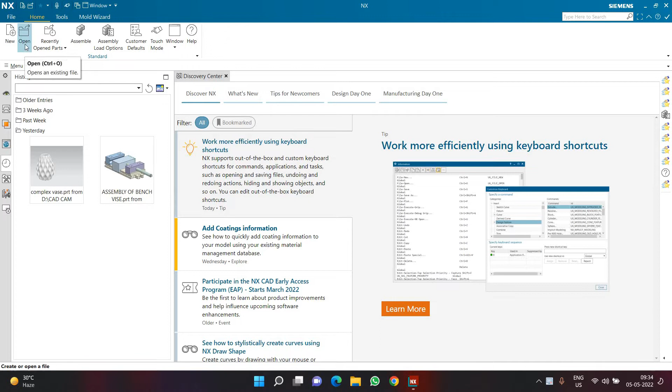In today's video, we are going to understand again about the same thing, that is the assembly. Now in the previous session, we have already completed the assembly, that is we have already placed all the components where it's supposed to be. Now again I'll repeat, if you want to open an assembly, you have to click on open. You have to browse for the respective folder wherever the assembly is placed.

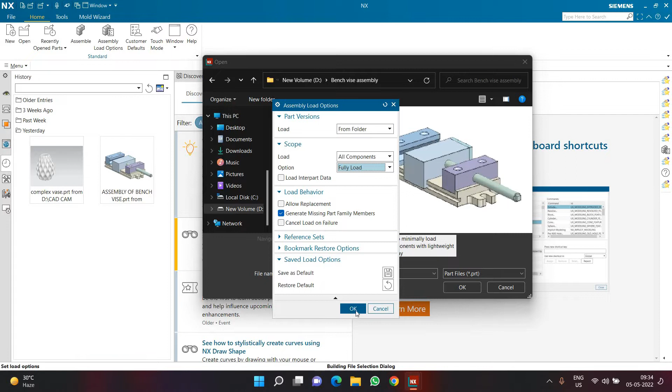So in this case, the assembly is being placed inside the D drive, inside the Bench vise assembly folder, and you can see over here there is a name called assembly of bench vise. We have to click on options. We have to activate this option called all components from folder, and we have to choose fully load. If you need to allow replacement, you can always check this particular box. Once this particular part is ready, then you have to click OK and then select the assembly of bench vise and click OK. Now this is how you are going to open the assembly.

In today's session, we are going to learn about how to create an exploded view of this same assembly. So what is an exploded view? That is how exactly the things are going to get assembled, or how exactly the things are going to move in order to get the assembly done. Okay, so let's get started.

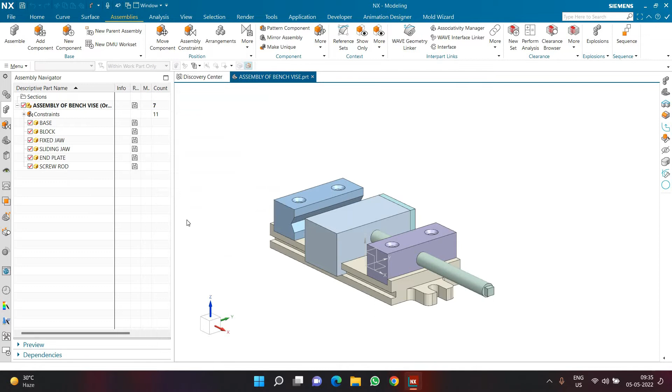Now here, in order to create an exploded view, I have to go to the assemblies tab, and here we have an option related to explosion. Now once you manage to find this particular option that is related to explosion, you have to click on the explosion option. Then you have to create a new explosion. So here I'm clicking on creating a new explosion, and now the process is fairly simple. You just need to select the geometry.

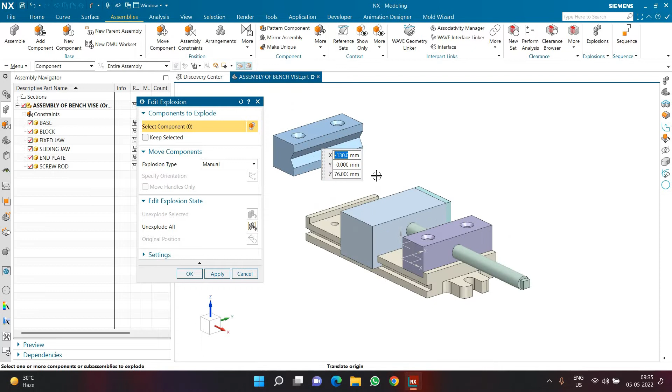Then here in explosion type, you can either select manual or automatic. I'll choose manual. And here in specify orientation, you just need to move the geometry. For example, here I'm moving it up. Again, I'm selecting the geometry, specify orientation, moving it here. Okay, so this is how the part is going to look when it is exploded, or where it is not in place. So this way a person can easily understand how the parts and where the parts are placed together in order to complete the assembly.

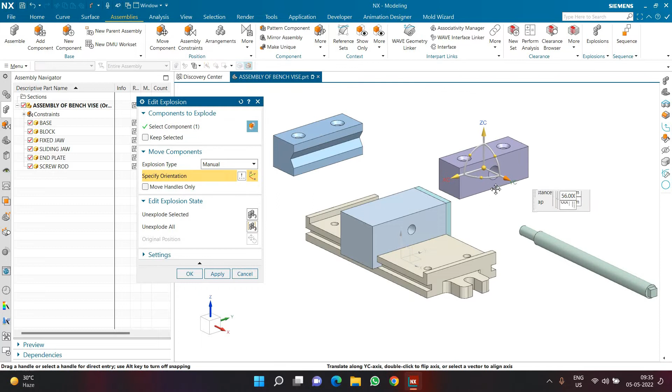So here, for example, right now I'm moving the screw rod a little above. Then similarly, I'm selecting this and moving it up. Okay, you can either move it slightly up or more up depending upon your preference. Then again, selecting this and moving it here. Okay, I would prefer to move it in a particular way where how the assembly is going to be done. So let's say, for example, I'm moving the end plate over here, and then I'm moving it up. So this is how I can define where the location of the end plate is going to be.

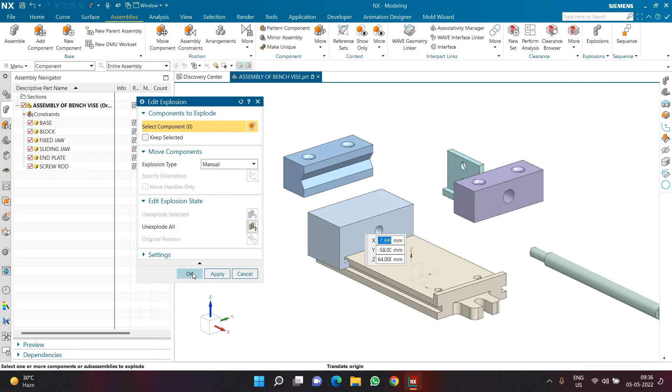Finally, I'm selecting this, moving it in this direction, then again selecting this and moving it upward. So once the assembly exploded view is completed, I can just simply click OK, and this is how the exploded view is going to look like. Now the best part is, anytime I want to see the explosion, I can hide, or I can see the explosion anytime I want to.

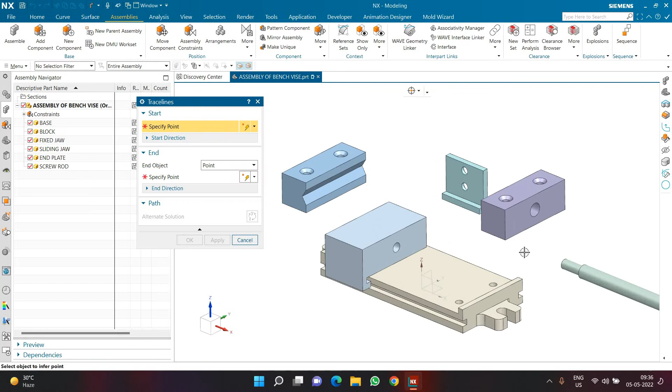Now the best part about this is, whenever I am in the explosion view, I can also click on this option called create trace line. Now once I click on this option called create trace line, I have to specify the start point and the end point. So here in this case, for example, this particular object is going to fit here, so I can create a trace line like this.

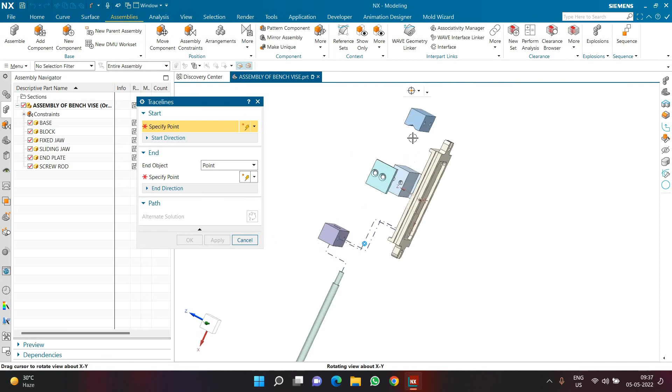So this way a person looking at the diagram can easily understand where and in which location the parts are going to go. For example, this particular hole is going to match over here, so I'm creating a trace line here. Similarly, this particular hole is going to match over here, so I'm creating a trace line here. So once the trace lines are completed, so for example here, this particular part is going to go over here, so there is a trace line here, and again there is a trace line here. Okay, so we can define this trace line. This will allow the software to understand how the parts are going to place together.

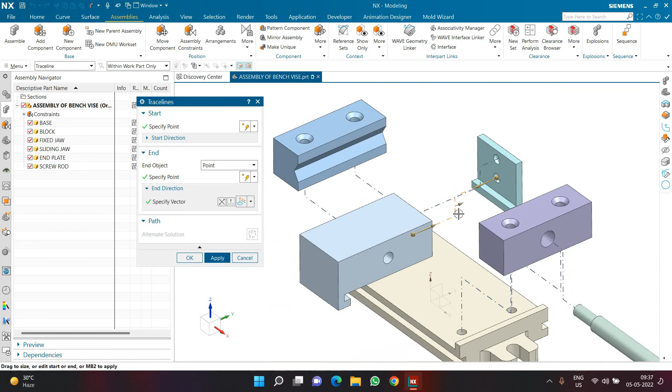For example, this one is going to go in this center, okay, not this way, the other side. So I'll click on apply, and this one is going to go in this center. Okay, I don't want my trace line to look like this, so I can simply move it further or backward depending upon how you want to place it. Similarly, last thing, I want to place this one exactly over here, and this is how this particular trace line is going to look like.

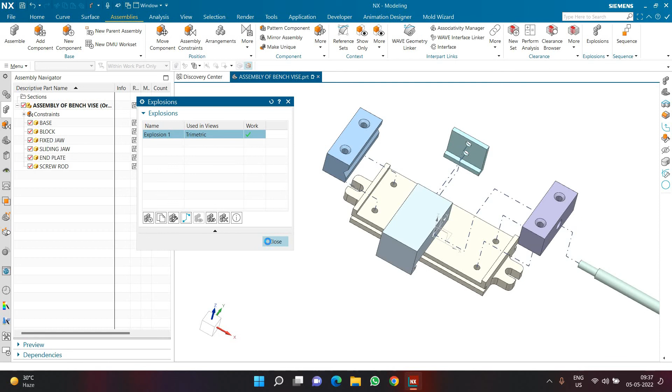Okay, now if you want, you can cycle through solutions of different trace lines. Once you are happy with the current solution, you can click OK, and once you are ready with the explode, you can click on close. So this is how the exploded view is going to look like with all the trace lines in place. Okay, so again, I'll go to explosion, I'll hide my explosion so that everything closes back together, and I'll press the home button on the keyboard and save the file.

So this was all for the entire session, and we have learned from the scratch how to build all the parts, how to create individual parts, how to place individual parts in an assembly, along with that how to create an exploded view, and how to make the entire assembly work.